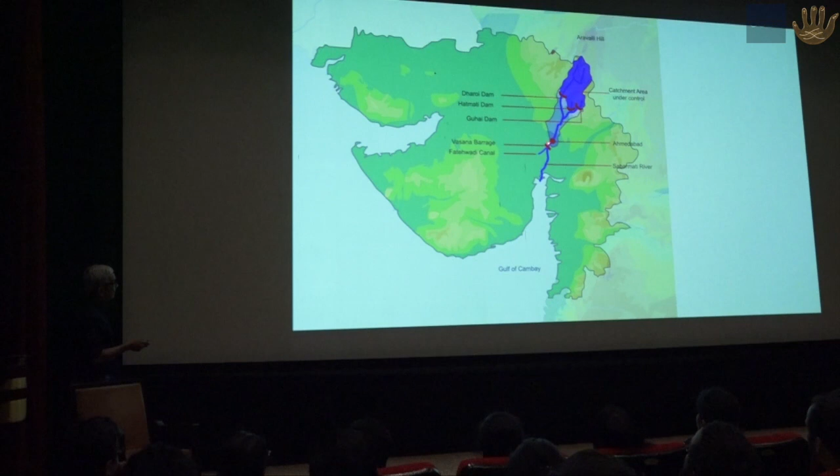When these dams were built, there was also a barrage built downstream of Ahmedabad here, and that was for irrigation. It's a low barrage, a 20-foot high wall, and that would hold water in the river after the monsoon, and the river started looking like this. So we had a seasonal lake in the middle of the city since 1976. Few months after monsoon, we would have water, and then it would go away as soon as the water was used up for irrigation. It would be empty riverbed, and the river would start looking like this once again.

Then, after that, the Narmada Dam was built, and as Ram explained, there was a canal that was built to take water up to North Gujarat and to Saurashtra, and that happened to go past Ahmedabad, just upstream of the city. Once this canal was built, we had a possibility of taking water from the canal and putting it into the river for irrigation. Now this made it possible for Ahmedabad to have a perennial lake in the middle of the city.

All of this happened without any reference to Ahmedabad. This is for irrigation, this is for flood control, and none of it had to do anything with the riverfront project. Once this lake got done in the middle of the city, we have this sort of a lake. You can see this river is sloping down from here to here. Here's the barrage, and therefore there is deep water here, and then slowly there's shallow water here. It's like a swimming pool. The bottom is sloping. We had a landscape full of lakes earlier. Now we had a large lake in the middle of the city.

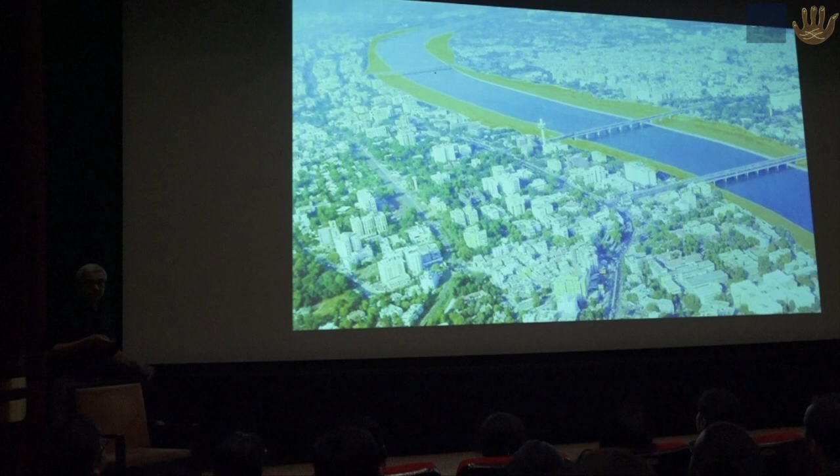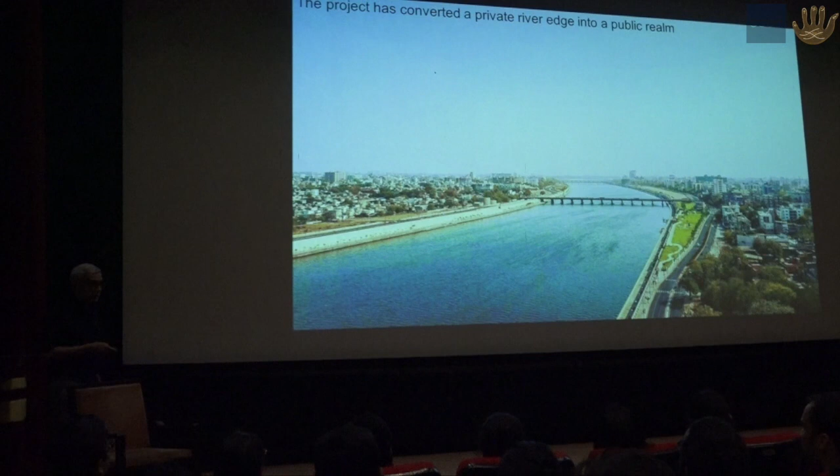The river used to look like this in 2001. And here you can see in 2006, the work has started here. And 2009 and 2015, and that's now the river with a public realm on both sides of the city. A river that used to look like this, today looks like this. So this is lots of space that was created.

It's a river without sewage. All this sewage that used to come in has been diverted through interceptor sewers. And this is the sewer being built, and the water is now more or less clean. There is still some work pending. It's a river for recharging groundwater, and the sewage treatment plants treat the water and put it back into the river so that we have a grand recharge mechanism. This work is ongoing, but there are other plants that have already started.

It's a river without slums. 11,000 families were given housing in all these red spot areas within the city. And you can see the houses were of this sort, and that is kind of interior view of one of the happy homes that was built. So 11,000 households. The project, I think Ram made a statement, it was not 11,000 crores, it was 1,100 crores. And the project cost was 1,200 crores. This is the cost of 2 5-star hotels. Okay, 2 5-star hotels is the cost of the entire project.

Anyways, no risk of flooding. Ahmedabad river used to flood, and everybody who could afford it had built walls of this sort. Now there is a common wall, and you can see the river in flood here. The lower level is submerged, but next day, after the water recedes, it becomes once again a usable place. It has to be cleaned up a little bit.

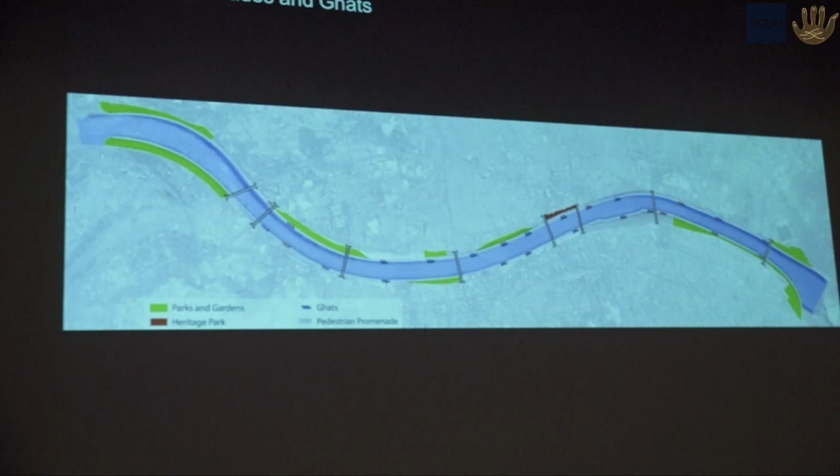It's a riverfront with parks and promenades. You can see there are many new parks along the river. Okay, and that was when it was opened up in 2012. That's from 2012. It became a place of pride for the city. Here's in the monsoon, and here's people sitting there. It's a place for all sections of society. You can see here, and that boating and exercising, and there are parks of this sort. This is a picture from 7 years ago. That's a new park that is coming up shortly.

So it's a riverfront with many amenities. That's a huge open air market for poor people. It's the flea market of Ahmedabad that you can see here. It's a Sunday market, which it was claimed was being wiped out. That's the kind of market that you have in place. These trees have also grown. They will also grow more. This is a laundry facility for all the dhobis who used to be there.

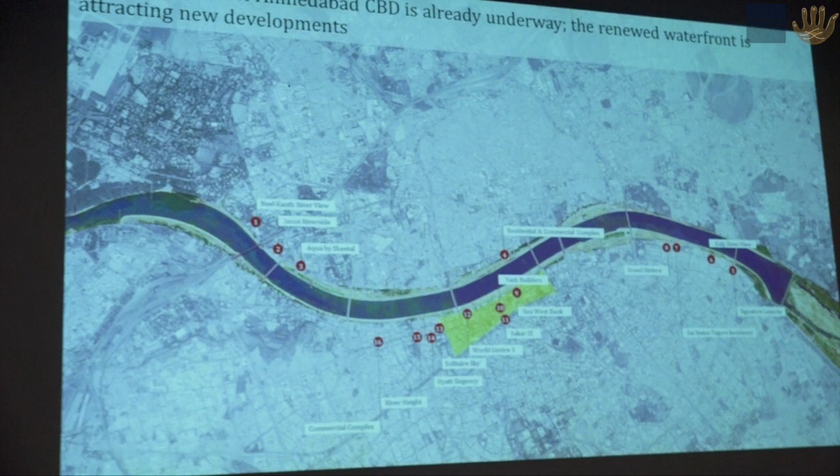This project has revitalized the city center. You can see many new projects coming up along the riverfront. All the developers are advertising their projects along with the riverfront. They are also paying for their FSI, so the city has a new income source. Here are some other projects. These are from developers' brochures, and here are places like this from which you can enjoy the river view.

We have a better street network. We used to have a poor street network, north to south, and this new street network was added because of the project. And this is one of the views of the streets. Here's another view of the street. There you are, that's another view.

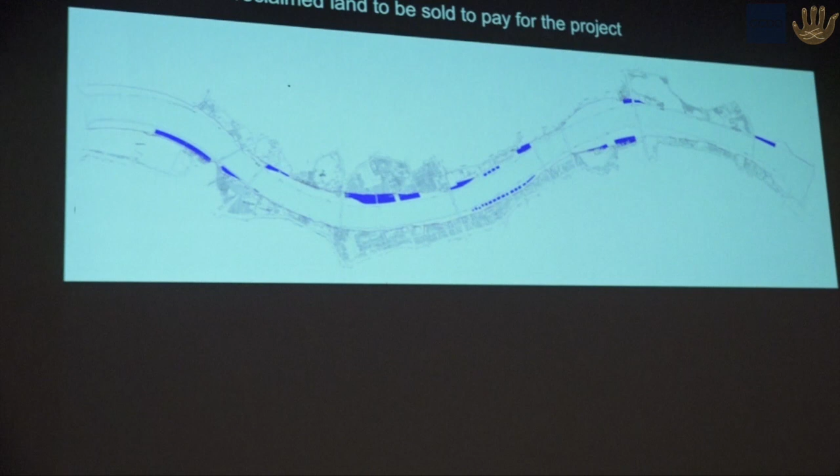So this is, in a sense, a proof that projects like this can be done, despite our fractious and difficult democracy. We don't need to be like a very authoritarian government. We can still do projects. They have to be structured in a certain way. They have to bring benefits for everybody. They have to make sense for a large number of people. And you have to implement these projects well. So that's the proof that some of the rest that I'm going to talk about can actually happen.

Okay? So let's start with the Mumbai project. So that's one of the 3 ongoing projects that I'm going to talk about. So the opportunity. Now you see that's Mumbai here. That's Marine Drive here. And normally we see this edge of Mumbai. This is where that big bridge is. And we see the western side of the Mumbai city. Eastern side, all of this is the port of Mumbai.

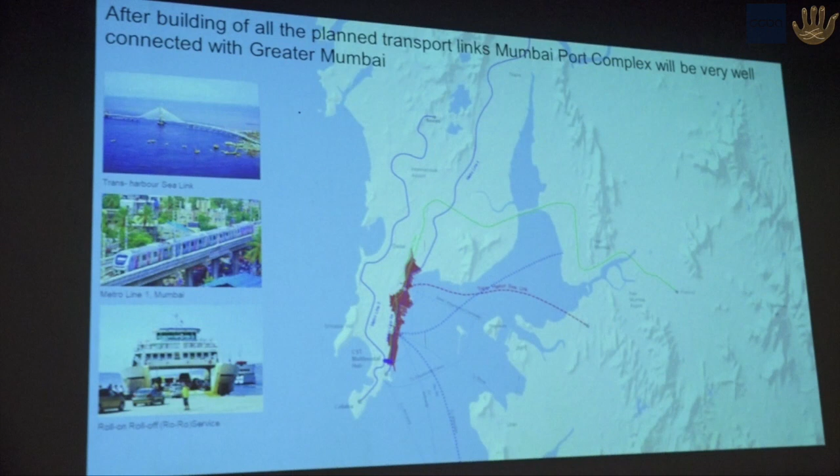So it's a terrific opportunity for the city to rejuvenate itself and make better use of this land. Of course, as soon as this project comes up, the first thing that comes to mind is the Mumbai mill land issue, where the owners of the land, in this case the government of India, which means all of us, are the formal owners. And of course, if it's valuable land, we want to monetize it. We want to ensure this land is used in a way that brings benefits to the entire country.

And the people of Mumbai are also very keen, because they say this is our city, we have very few amenities, and we would like this land used in a way that helps Mumbai. The mill lands ended up in a big fight, and because of the way that fight was structured, the whole of Mumbai in a sense lost out, because finally they asked for too much and got nothing. That's at least my view on the matter.

So what was clear to us when designing it is that we would have to turn a zero-sum game, a fight between the formal owners and the city, into a win-win game. And all urban design projects have to be like that. We think of everything as a zero-sum game. There are activists who say, I will save every tree and everything else be damned. There are activists who say, I will save heritage buildings and everything else be damned. They are like people fighting for their roadside shrine: I will save my shrine, the traffic be damned. We have to figure out ways to turn such zero-sum games, you win, I lose, into win-win games, where everybody wins something.

That was just a sort of a visual of how we believe the Mumbai Eastern waterfront might look like when it gets fully developed. But what are the ideas underpinning this vision? And what are the urban design elements like? Since I think a large portion of the audience is urban designers, architects, etc., I'd like to focus on some of these ideas here.

So here's what we see as the master plan. Here's another view of the same thing. And I want to say that it's made up of these many elements. Let's start with the first one. At the core of it, the plan is nothing but a strategically drawn street network. Here, that's the large piece of land that we are working with, about 7 square kilometers of land. And a dense street grid is at the heart of this plan.

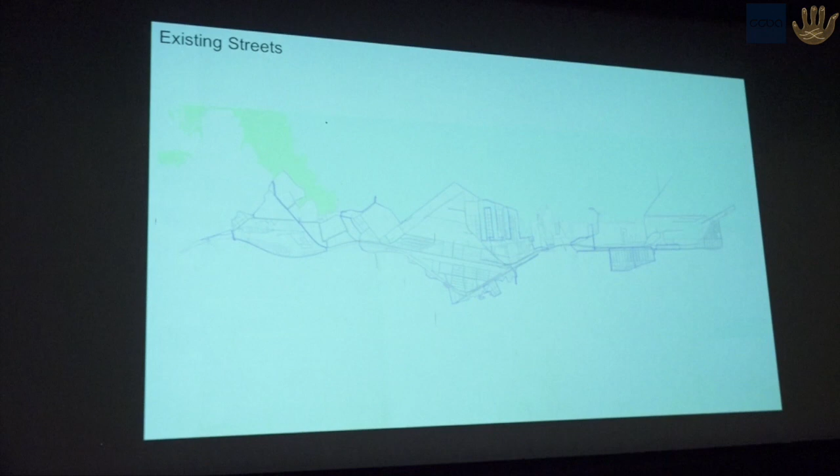What we did to draw this is look at the existing streets in the port, because the port already had some streets. We decided to use many of those streets, perhaps widen them, use those alignments, we added more streets to them and came up with a grid that matched with the grid of the rest of Mumbai. So this is not just a grid of streets standing by itself, but also integrated with Mumbai streets.

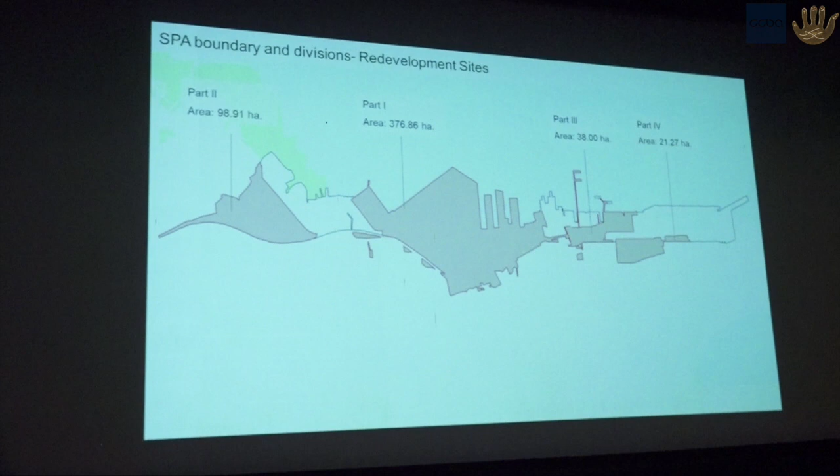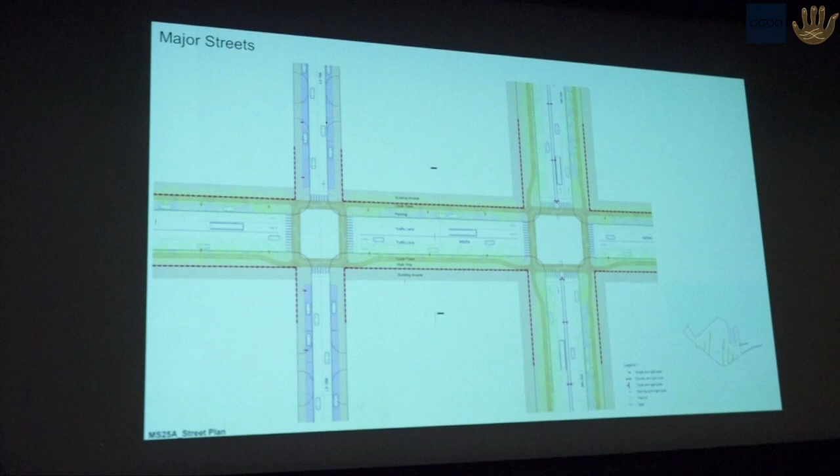Just take a closer look at this. Actually, it's made up of four parcels for redevelopment. I'm going to look at the center one here, and that's what the existing streets look like. That's the streets that are added, and that's what the street network looks like. Of course, the street network is also hierarchical. It has functional hierarchy, and it's been detailed with considerable care. This is the design for the major streets. All the other streets have been detailed, and this is the urban design vision for those streets.

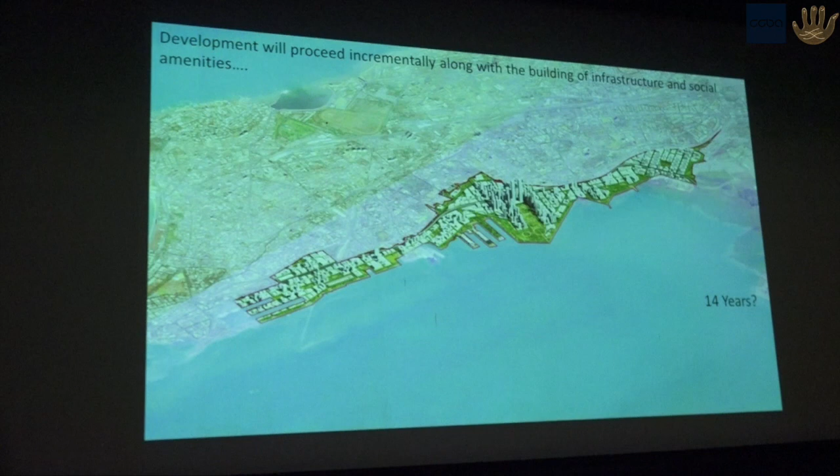Once the grid is in place, something will come up. In this case, the land will get freed up slowly as the leases get over, and bits and pieces of the city will come up, and over a period of time, it will all fall into place. So it's not as if this is one grand vision to be realized on one day, but it's incremental development, uncoordinated, messy, you might say, but the street grid is what will hold it in place. Okay, so that's that.

Second, public transit is very important, and more important is to integrate it with your street network. That's really important. I already told you there's lots of public transport planned for this area. The important thing is to integrate it with the fabric of the city and with the city streets. And that's what has been done here. You can see very carefully the metro alignment has been changed so that it matches with our street network.

It takes a lot of work to bring all the agencies together, and that's the work that's involved in urban design. It's your coordinating function. You are nothing but a coordinator at that level. And then to see that all the stations from there, what are the walking distances and how do you get to all the stations.

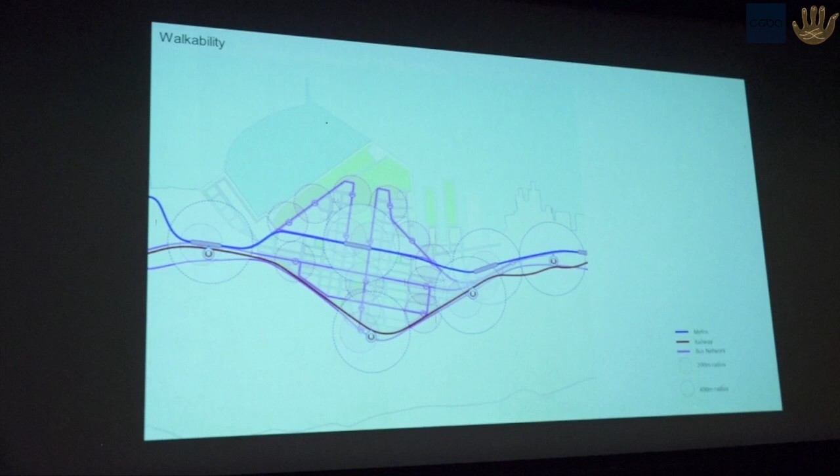Integrated and upgradable infrastructure. So once again, once you have a street network, you can put in all the infrastructure that you need. You can put in the power supply, you can put in the water supply, you can think it all out and say how much will be needed and work out the sewerage strategy and the solid waste disposal strategy, etc. And then you can also work out on the street what are the ways in which you put in all your services. But the important thing is not that.

The key insight to remember is that infrastructure of any city in the world is not built at one go. Nobody builds world-class infrastructure at one go. Everybody improves upon their infrastructure. So for all the people who say, have you done the infrastructure? I say, my friend, which city in the world has built its infrastructure on day one? What's important is leave adequate space and be ready to upgrade as the city grows.

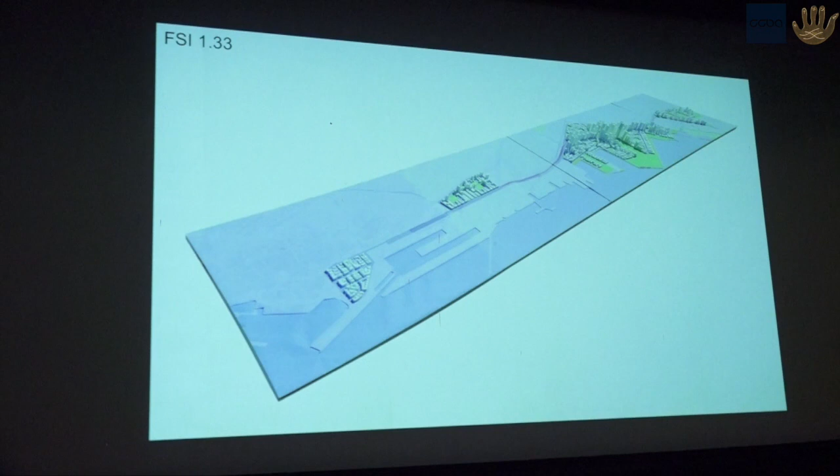Street network in the Mumbai plan allows for later strengthening of public transport, later addition of more infrastructure. This will permit more floor space to be added in future. Presently, we are putting in infrastructure only for a 1.33 gross FSI. I'm not talking about plot FSI, gross over the entire area of development. But we believe that later on, the next generation, there are going to be people who will say, oh my God, these people were very timid. Let's put in more infrastructure and build more. And we believe that after that, they will build more.

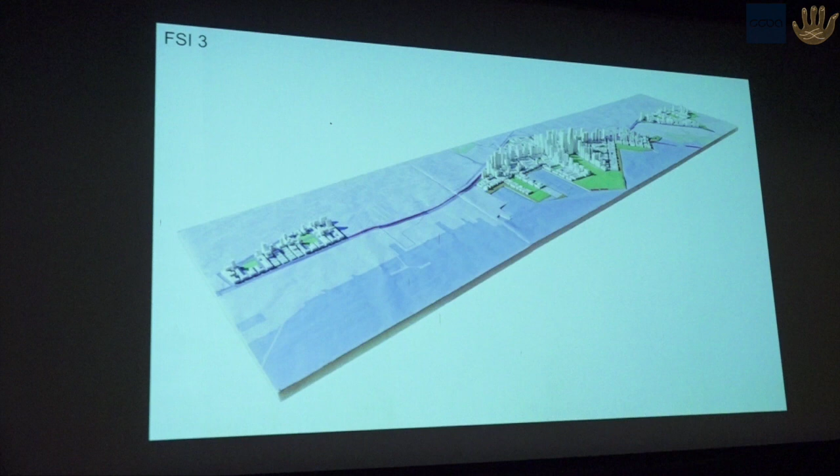Even when they come to this level, they'll be nowhere near Manhattan, because that has even more floor space. Okay. That doesn't mean there are more people. What happens is people become richer and they consume more floor space as societies become richer. And that's the story the world over, including India up to now. Adding more floor space does not add load to infrastructure. Adding people does. So don't limit floor space. If you can't limit people, just add more floor space. Okay? I don't want to get into too much detail here.

Now, here's a very important point of this plan. Indian cities, and I'd like you to look at this particularly carefully, because it's a very important thing that all urban design people should understand. We use our land very poorly. What do I mean by that? That's Ahmedabad, I showed you, and we took these 500 by 500 meter squares for study. And if I take this one square here in the center of town, as you can see, right next to the river, that's what it looks like. And I'm sure Pune looks like this too, and most of Pune looks like this.

And if you were to study the land use here and divide it according to the categories I'm telling you, not what planners use, not residential, industrial, and all that sort of stuff, but like this. First you find out how much is in public streets. Sorry, this has got all completely washed out here, but about 16.8% of the land is in streets. I'm sure Pune gives you similar numbers. How much in public open space? Very little. Streets and open space together make the public domain of a city, and most Indian cities have no more than 20% of their land in the public domain. Okay?

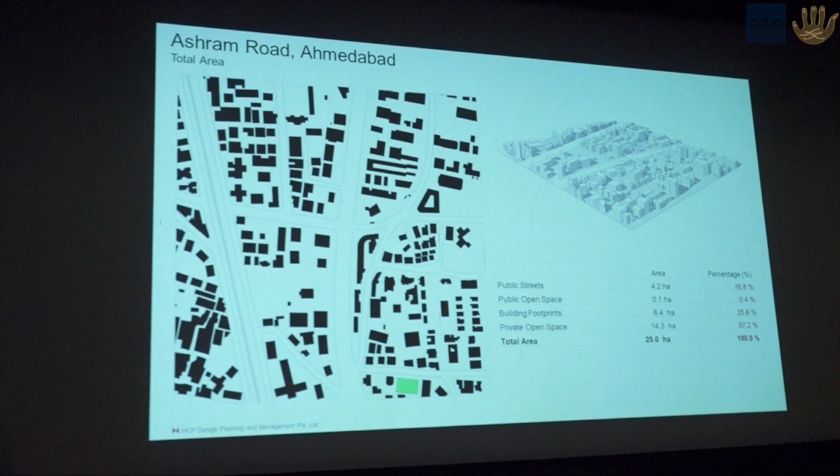All that 57%, sorry, there's something wrong with the slides here. If you look at this, all the 57% is the private open space that we are forced to leave around buildings because of building bylaws. And that constitutes a waste in Indian cities. All that red line is the private open space that cannot be used legally, and this we end up using suboptimally.

You see, all our cities look like this. They have lots of tiny fragments of space like this. It all adds up to 57%. Nobody makes that calculation. They are making the rules. But the rules end up forcing you to do this. And how do we use these spaces?

They are not very well usable. You know, as designers, look at these spaces. You can't grow trees, you can't play a cricket game here. You can romanticize about this, but when space is scarce, this is a waste of land. And I urge urban designers to actually walk around in cities and find out how these slivers of land are used. You take Mumbai, you have the same story.

You take Nariman Point, the costliest piece of land in the country. This is what it looks like. Once again, if you look at the figures, you see 53% of it is in private open space that cannot be used. Okay, ridiculous. It's very easy to do this research. It's Google Images, nothing else.

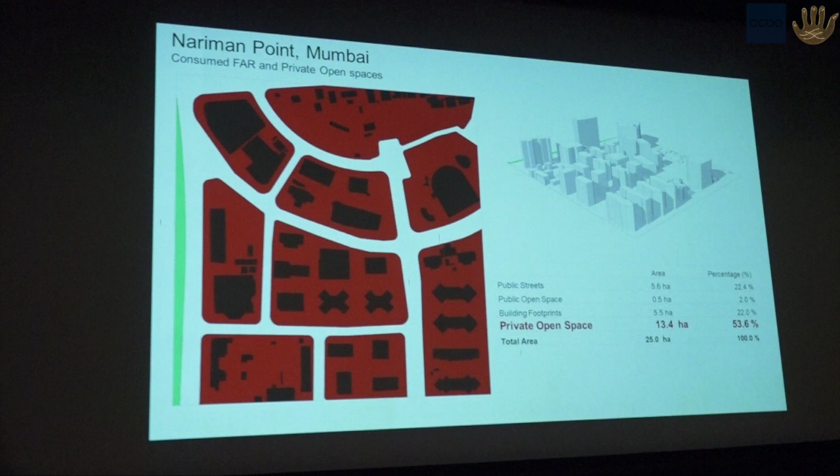Okay. Other cities in the world, take London, go and check it out. Here you have almost 30% in the public domain. So already doing 1.5 times better than us. No wonder their streets are walkable and we all go there as tourists. And their building footprints are, what's that, 65%? Okay. They know. People want more ground floor space, so allow.

So planners don't stop them from using it. They actually allow them to use it. And then you have private open space, which is very little, which is 4.8. You will see that in every city in the world. San Francisco here has 32% in public streets, and parks and gardens, 36% in the public domain. You can see 61% in. Now this will change as you take a square of the city, but this is an average. And private open space is this.

We can say that generally speaking, in Indian cities, that's the situation. 20-25% in building footprints, 20-25% in public realm, and a big waste of 50 to 60%, and this is done by bylaws. Man-made. There's nothing that tells you to do it this way. Now, in western cities, 50 to 55% in building footprints, 35 to 40% in public realm, and 10% in private open space. No wonder those cities work better.

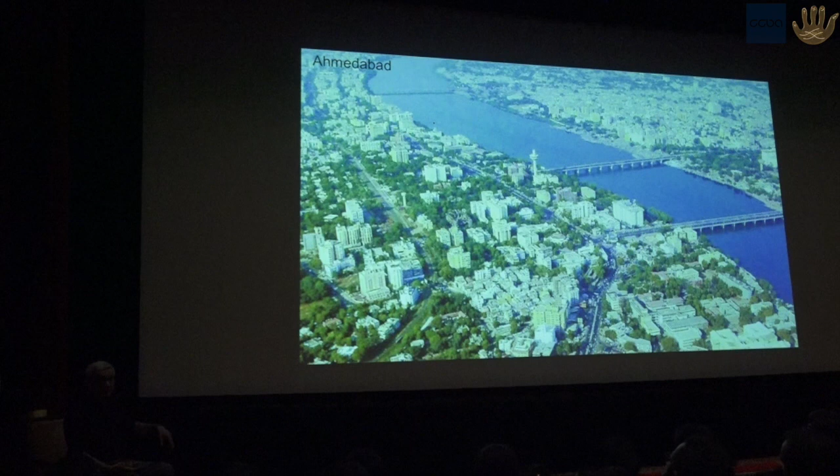Now the port redevelopment makes very sensible use of land. And by doing this, it turns a zero-sum game into a win-win game. Okay? If you were to compare the port development to the rest of the island city, here's what you will get. The land in streets in this area here is 36%. In the rest of the city, it's 17%. So we are already putting twice the amount of land in streets.

Nobody ought to complain. The amount of FSI we have here and here is the same, but we're putting twice the amount in streets. And streets are the most important area in a modern city. That's your public domain. The next is parks and gardens. We happen to put, in this case, 26% of land in parks and gardens because Mumbai is starved of it, and the rest of the city puts 8%. Okay? So 26 and 36, 62% in the public domain.

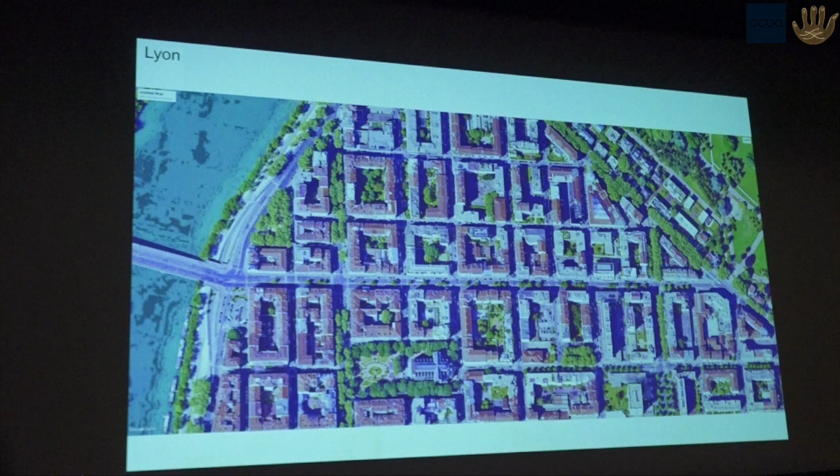Low-rise is like this in Lyon. You can see you have well-defined blocks. You have low-rise buildings. You have streets. You have open spaces in the middle. And the streets at the street level, if you look at it, will look like this, not very tall buildings. We have examples like this in our cities.

Okay, Ballard Estate, when it was built with this sort of urban design form, thoughtfully. And here every building was done separately, and yet they all added up to make some sense. And so you got a wonderful urban area that looks like this. It has streets, it has ample space for trees, it has buildings like this, and coordinated arcades. Every building is different.

Architects have done their numbers, so to say, but the urban plan has ensured that a form emerges that makes sense. Everybody matches up with everybody else. Okay, and the Mumbai plan is designed to do precisely that. I'm losing contact with this. Okay. It's like the plan for Ballard Estate.

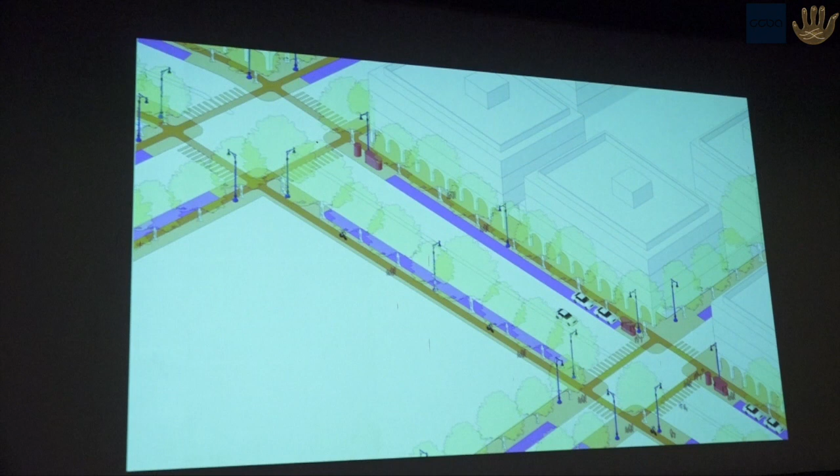All the blocks have been well thought out, and the floor heights are fixed in all of these, and so the volumes are fixed, and it has been thought out in careful detail. Now the architects can go in there and build within that volume. But none of this is possible unless you have good bylaws.

So we had a chance to write a new type of bylaws here, and we do not use text-based rules like our normal bylaws. Our normal bylaws look like this. There's not a single drawing mostly in these books. They are all text-based. They are written by administrators and bureaucrats. These are not drawn up. If you are concerned with form, you'll have to draw up your bylaws. That's the opportunity that this project provided.

We made a very simple, easy to administer sort of building bylaws. I won't go into details, but if you can see this drawing, it's not very clear here, but here are the plots. If I zoom in here, sorry for this washed out thing, but these are the plots. These are all the plots that you can see. These are the divisions of the plots. These are the setback lines that have been drawn up.

These are the volumes, the development envelopes within which people have to build their buildings. So from day one, the volume within which the building has to be built is done. We know which are going to be the tall buildings, the lower buildings, the higher buildings, etc. All the neighbors know what's going to come up next to them. Inside it, this is the amount of floor space that you can fill up in the volume.

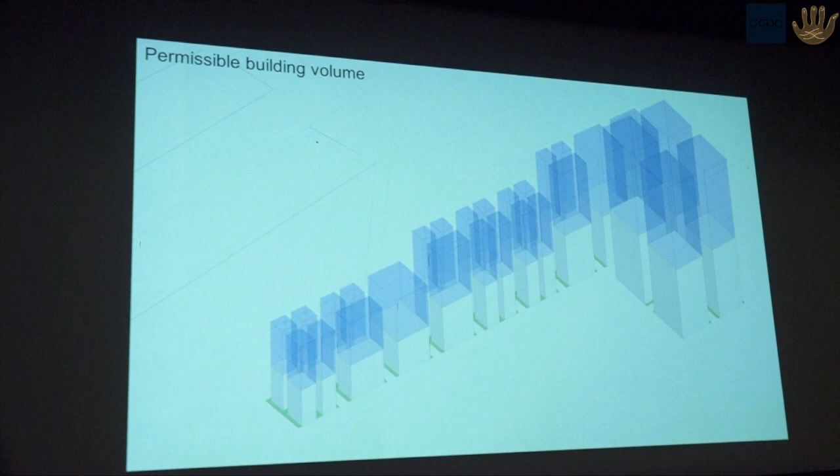Nobody will build buildings like this. The architects will all design separate buildings according to the needs of the client and the site-specific area. And these will all be optimized to meet the needs of the owner. Then you would perhaps get a landscape like this. This is just speculation. Every architect will do something different.

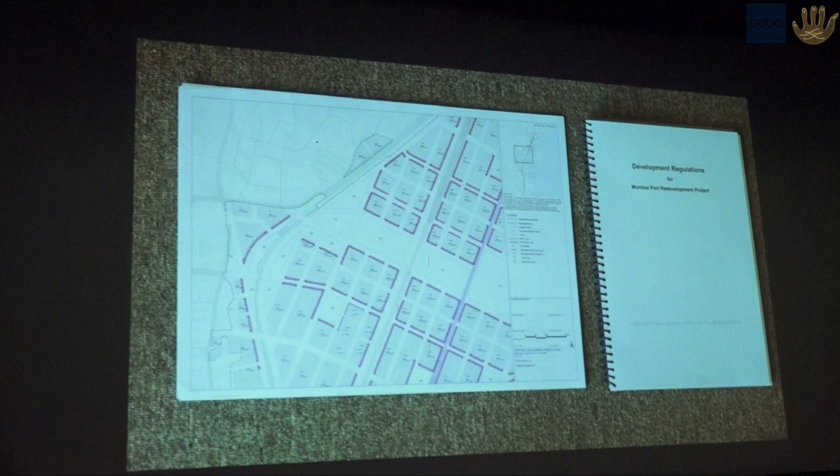The bylaws actually look like this. There's a set of drawings and there's a set of text-based rules. You will still need text-based rules for certain standards like engineering standards, etc.

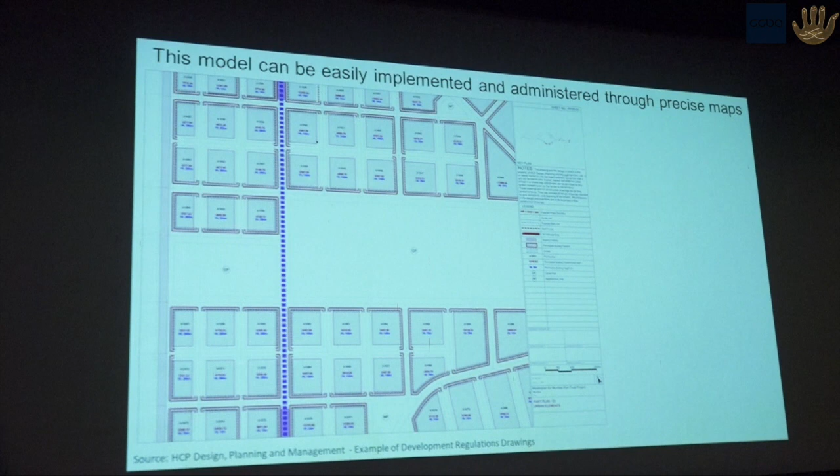But height and bulk regulations will all be in the form of drawings like this and of this sort, which indicate clearly, make it easy, just define the development envelope. Okay, many cities of the world do this. Look at the Singapore plan, you will find it online. Bylaws always have drawings. Ask for bylaws with drawings. That's what you have to do. Or some of you might later on do more of this elsewhere.

I've told you what this plan is about, and if it finally goes through, it's slowly making its way through the whole process. Recent political changes have made a little bit of a slowdown in the process, but it's slowly moving ahead. Someday if this develops and this plan is adopted, I think this plan, in a sense, proposes a new urban design paradigm for India.

We have been writing our bylaws and making our plans, which is the DNA of our cities, in a way that we get the cities that we have today. The plan and the bylaws already define the city. We are trying to write up a plan and bylaws that define a different sort of city. And that's what I wanted to say here. So we stop, first one done.

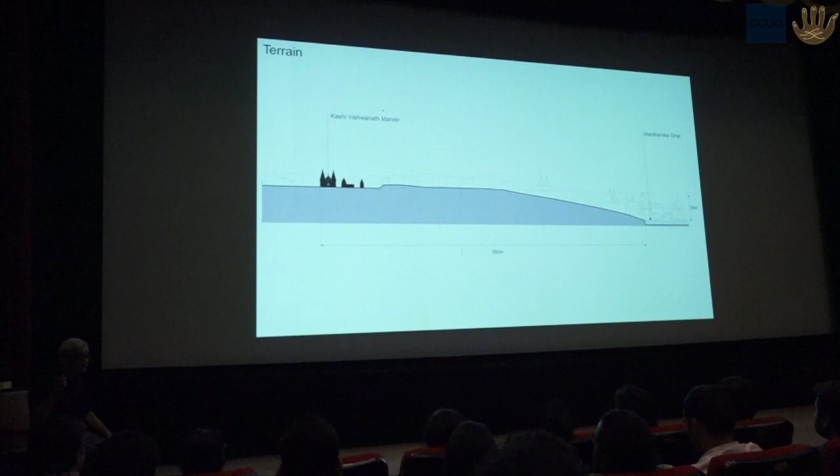If you look at this area, that's what the terrain looks like. That's the mosque. The mandir is here. Manikarnika Ghat is somewhere here. It's on a hill, 100 feet up, 350 meters across. Not a very large area. The temple and the masjid: there's a long history of the construction of the temple, its destruction many times. Finally, Aurangzeb destroyed the temple that was there and built the Gyanvapi Masjid, and the temple wall was left at the back here. That's the way it stands today.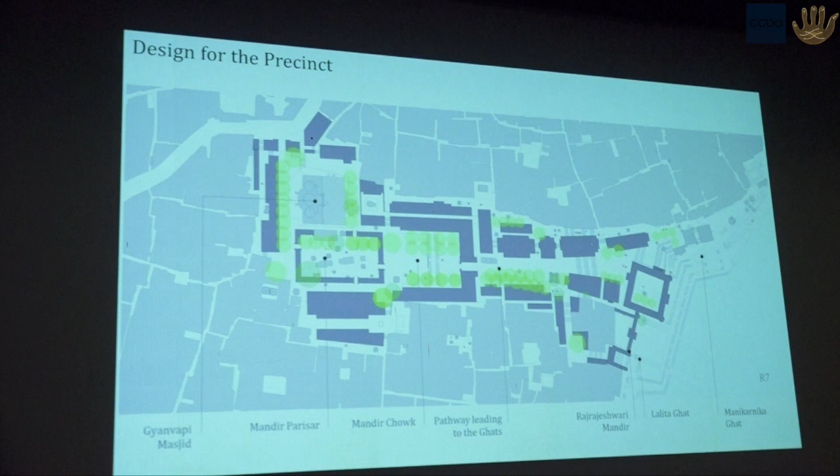Even if I were to design a home, somebody says, do me a home, that's how you do it. Okay, I've drawn something, what do you think? And they say, nah, not like that, like this, like that. And then you throw the sketch away and start again. So the sketch kept going on, and finally, that's where it stands. Now let me explain what this is about. That's taking that area and turning it into an area like this.

Let me explain different features of it. The parisar is simple. That's the yellow area I'm talking about. Presently, the parisar is that small. That's sort of the ambulatory around. You can see it's very tight. Hundreds of thousands of people come here, and it's a very, very tight spot here.

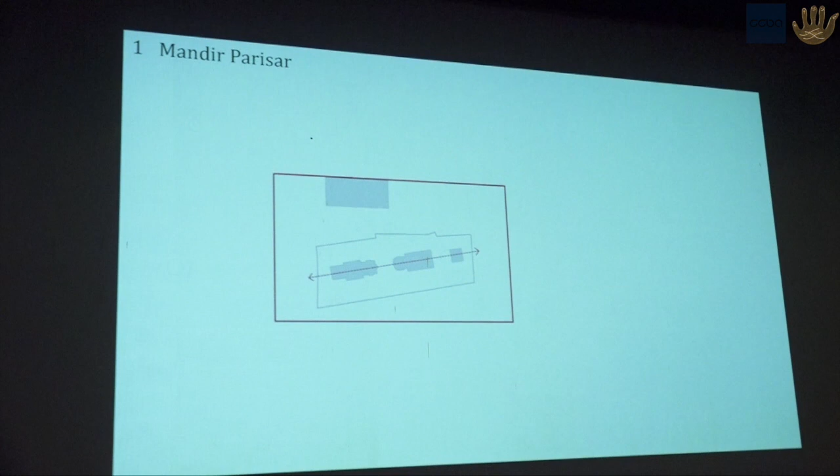So we took that area here. We sort of saw the axis of the temple, put two squares around it, straightened it out to align with the mosque, to align with the important structure next to it, made it a little larger, and then put an arcade all around it, and essentially created a larger space around the temple and a parisar that would be pretty much in the traditional form. And that's where it is.

Sorry, these drawings are not going to come up here very clearly, so I'm just going to move on to the next one. Hopefully this will come. It takes a little long on this computer. Forget it. Next one. You'll see it later.

Outside it, we have this chowk. So we took this rectangle that we had put in, extended it twice the amount here, and created a civic space outside the parisar here, and built a building around it that would hold lots of facilities. For example, a large number of toilets, because you need a huge number of toilets. It's pretty straightforward what you want to do when you have to create facilities. On the upper level, maybe shops, maybe an exhibition place, emporium. I'm not going to wait for this drawing. Let's look at it later on, and you will be able to appreciate what this is.

There are many approaches to that area. From the road, there is actually just one approach. So there's a street like this to this big temple, and that approach has been improved. Presently the approach looks like that. That's the entrance to Kashi Vishwanath Mandir, by the way. And so that needs to improve and become better. And if some sort of emergency vehicles can come in, it will be better. So that's what we have done out there.

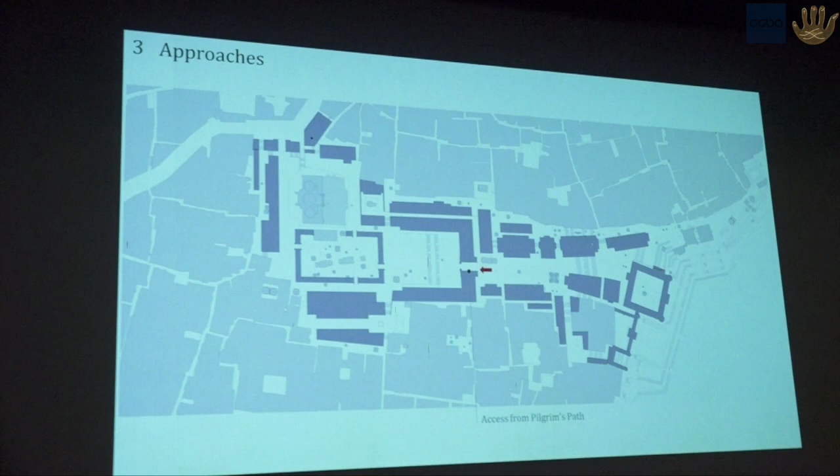Then you have an approach from the Ganges side here. That's really on axis to the temple. You want to come here and you want to create a gateway. From the gateway, the first thing you see is the shikhar of the temple. That's the gateway. The gateway is designed using one of the local gateways as a model, and so it reminds

you of that area. The path leading up from the Ganga up to the temple is that. If you arrive by boat, this is how you will approach it. You will see these large pumping stations, and you will see all of that here. If you come by boat, it's difficult to get off really. It's not very comfortable to get off at this place. It's quite messy. And then you go up this lane and into a narrow alley, up that place here, and go through these lanes and go to the temple.

Okay, but I think now there will be a different approach. There's a wider, larger space. You can climb up these steps. It has to be a pleasant experience so that you come here for a spiritual purpose. And if all the time you have to look down on the floor and see where you're walking, I mean, some people romanticize this, but I think that's not the idea. So that will be the approach that will lead you slowly up to the temple here. And that's that.

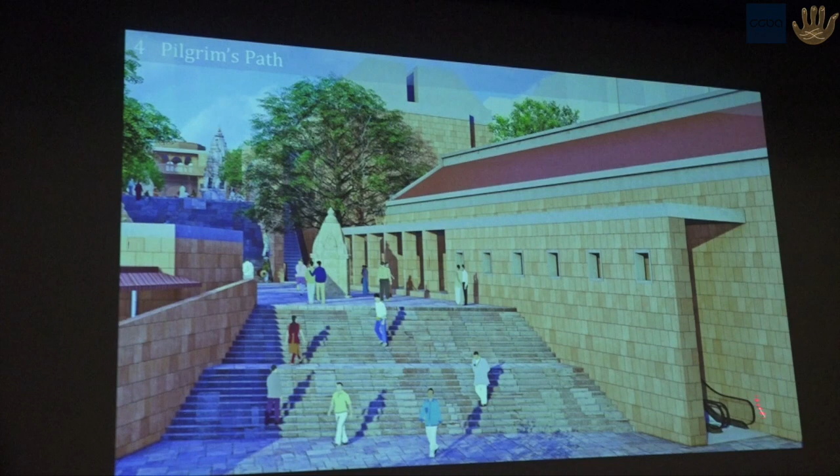Here you are. So also some escalators for older people to climb up here. And that's the view from when you're up there looking down at the Ganges. It's very poor. There's also cultural civic institutions along the path that you can see here. These are some old buildings that were existing. This one is an old one built also at the same time that the Holkars were building here. Jalasan Terrace, it's called. It's encroached upon by all sorts of housing just now. You can see it's really in poor shape.

That's that structure that's here, and actually the structure at the back is quite beautiful. One needs to bring it out and use that. Behind that there's this old hostel which can be restored. So that's what this area will be. Eventually a terrace up here, that's the old structure here. That's the hostel at the back, a stage here for performances, etc. Along the path, there are many other exhibition galleries and places like that. I'm going to leave this drawing and we move up here to this place.

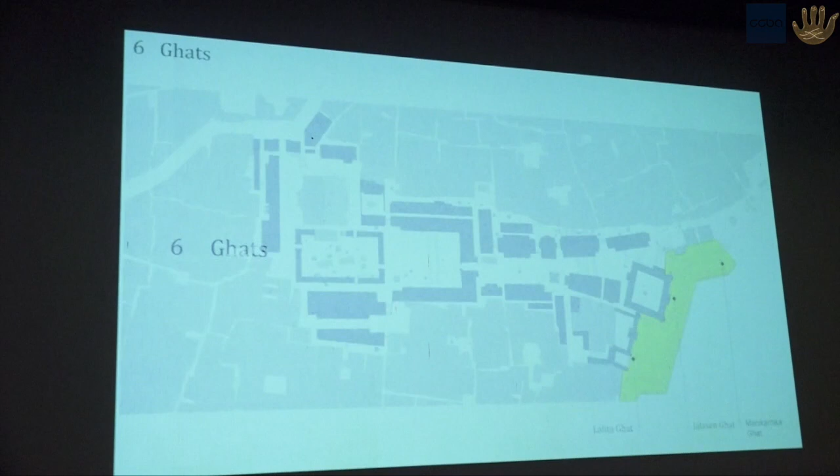The ghats themselves, there's much improvement that's possible here along the ghats. They haven't been taken care of for a long period of time. There are 3 ghats, we're not going to take care of all of them. Sorry, here you are. First, remove this sewage pumping station and bring this old structure back into the fore, and also create some jetties, a performance stage, so that you really get a much nicer area there. That's Manikarnika Ghat, the most important cremation ground, and that also can do with much improvement. It doesn't have to be like this.

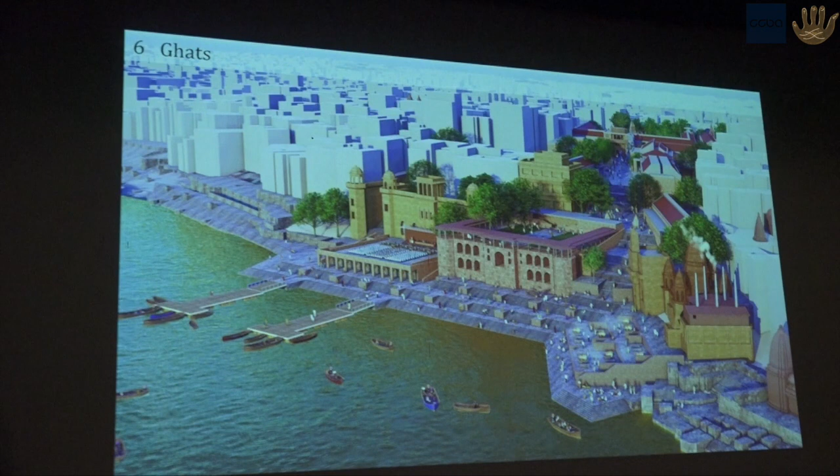Okay, so here's Manikarnika Ghat, and that's the development that we're talking about. Pilgrim and tourist facilities, lots of pilgrim facilities like food courts, guest houses, places to leave your baggage, places to leave your shoes, locker rooms, so on and so forth. And that's the idea here. Lots of administration and security facilities are required, offices are required. So essentially, it's a lot of logistics and a lot of functional improvement in this area.

There were lots of temples in this area. So when the houses were pulled down, we discovered magnificent temples that had been encroached upon by all the development. So when a lot of people talk about all the heritage being destroyed, they are not really looking at it in the fullest sense of the term. Here you had buildings that had their slabs put on structures like this. And when these buildings were torn down, you found temples inside. There were nicer buildings too, but many of the buildings were just encroachments, nothing else.

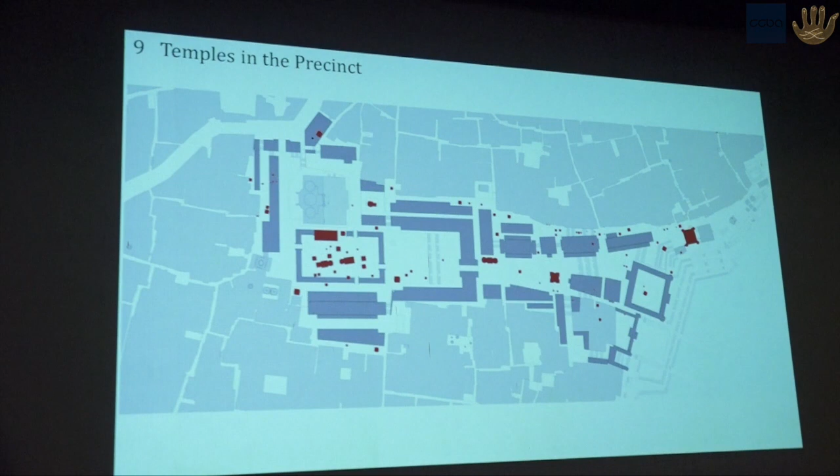And those are the temples that have been found. A lot of the later detailing job is about integrating all the temples with the master plan. So the master plan continues to evolve and change after this has been found. The landscape, there were very few trees here, but since it can be quite hot there, we'll plant a lot of trees along this area also. And here's a model that gives you a sense of what this is like. And very quickly, we can show you one film that just takes you through. Can we do that?

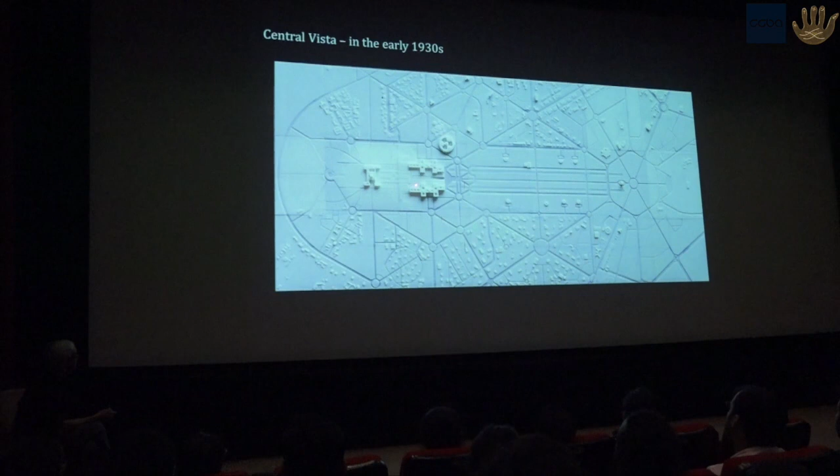Now there's no doubt that the Central Vista, built at that time, was a spectacular architectural achievement. It's magnificent. Even now, after being there so many times, when I walk up Raisina Hill and see the buildings, it still gives me goosebumps because it's such a magnificent achievement. It was built to house a colonial government and to symbolize the Raj, but it was unhesitatingly appropriated by the people of India and the government of independent India. That's in a sense the Indian genius.

That's Mountbatten leaving for the last time, the flag of India coming up, and on 15th of August 1947, people just swarmed over the hill and took over the buildings and made them their own. The Viceroy's house became Rashtrapati Bhavan. The statue of King George V was removed from the canopy. The canopy stands there. At the other end, Council House, that Ram referred to, became India's parliament, was never designed to be the parliament. And North and South Blocks house the most powerful ministries of the government of India.

Post-independence management of the Central Vista was, however, very poor. It lacked any sort of comprehensive and inspiring architectural vision. Already, during the Second World War and later, the two sites, these plots that were empty originally, were used for barracks-like structures that were coming up because there was need for that sort of space.

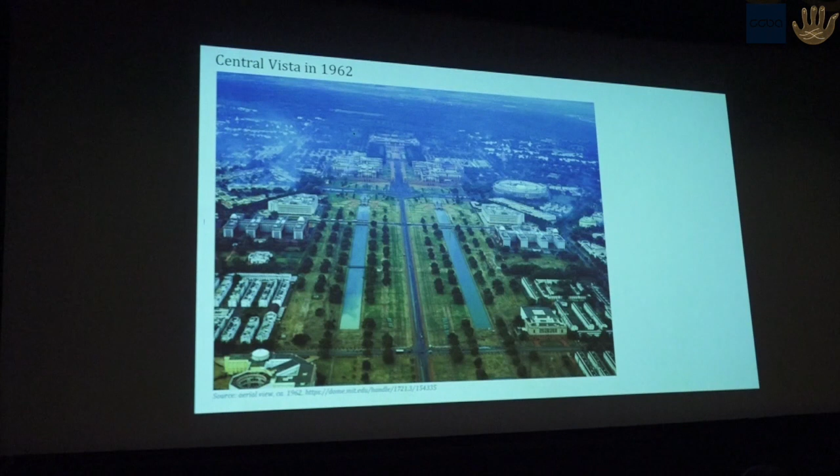sorts of buildings. 1962 picture, you can see here already Vayu Bhavan, Rail Bhavan coming up here. This new street was added, and this is Krishi Bhavan, Udyog Bhavan, and then those barracks-like structures, National Museum, various other such things. And you can see these trees here, two lines of trees for this place. So what we had inherited became like that.

Now, if you look at this, it's a disorderly layout of buildings that we have added out here. That's very clear. It's incoherent architecture. It's all different ones, don't add up to anything. A hodgepodge of different uses. You have residences with it, that's the vice president's residence, there's administrative facilities, cultural facilities, all rather incongruent and without any particular order.

No space for all the ministries to be housed in the Central Vista. Only 22 of the 51 ministries are housed here. The rest of them are scattered all over Delhi, meaning that everybody has to travel long distances to meet, which means that they often don't meet and operate in silos.

Some plots like this were hutments-like structures, which are called hutments officially, but actually are offices. They are not residential structures. They are inside walled compounds, very nice walls outside, but inside it's a rural, informal setting, very, very poor use of land. Lots of people working there, and facilities that don't necessarily have to be located there. Very, very poor use of land.

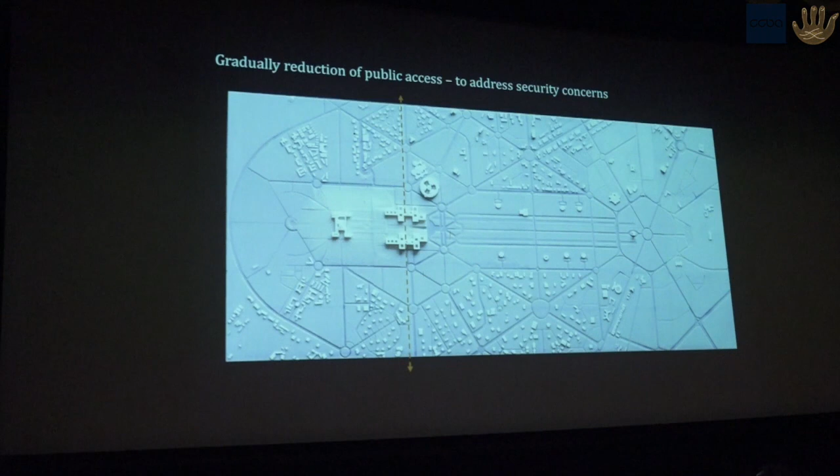Most of the buildings have a sea of parking all around. If you remember the earlier talk, ground footprint is very, very poor. Inside, if you look at it, that's what the offices look like. And even the access that people used to enjoy, you could walk through these buildings, because of security reasons access has reduced. Actually, the Central Vista itself is encroached upon by these bhavans to create space for parking. So from behind, the compound walls have been opened up and parking lots have been created on the other side, and some infrastructure has also been put in.

If you look at the landscape, it's quite lackluster. That's your central iconic space of the country. It's a big civic garden, very important for the people of Delhi, but there are very few facilities for them, such as toilets, etc. If you see here, inadequate facilities for tourists, and nothing like inspiring capital complexes world over.

If you go to Washington and spend a day at the mall, it's a comfortable and memorable day, and you will remember it for the rest of your life. It's a fantastic experience. You go to Paris, it's not the seat of government, but nonetheless, it's an iconic space. You walk up the Champs-Élysées, you go to the Louvre Museum here. That's a fantastic experience. Everybody from across the world wants to go there once.

Over the years, many people, many institutions have demanded that the Central Vista should be better administered, better developed, better maintained. In fact, people have written up administrative notes saying that these old buildings should be torn down and new ones should be built, and that its heritage should be protected. Nothing was done, like in the Varanasi case. Something is being attempted right now.

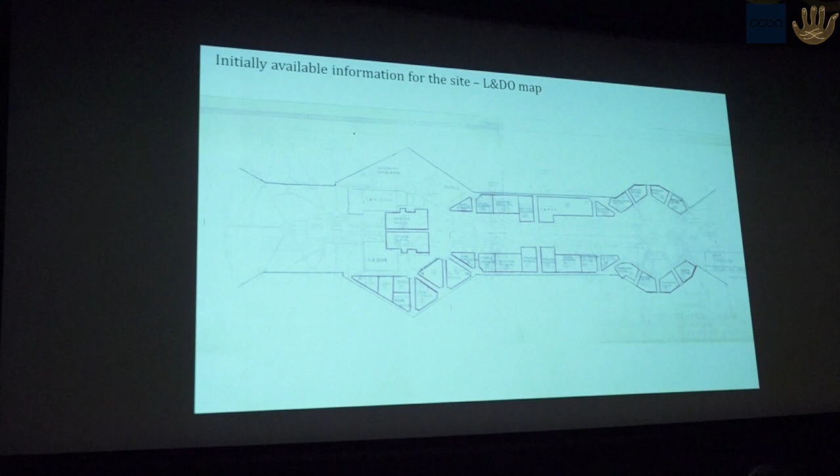So what's this project? Let me explain to you what the project is about. Well, once again, the master plan for the Central Vista project started with a sketch developed in response to very, very broad requirements, like the Kashi one that I was telling you about. Here you have, this is all the information that was provided. There were thankfully good history books, good historians have studied the buildings.

From that we could find old maps, and thank God for Google, because without Google what would we do? This has so much information that we were able to build up a model like this from the historical maps and what was in Google, and then we were able to build up a model of what we have done to that inherited space, and then we developed a sketch model for what can this place be.

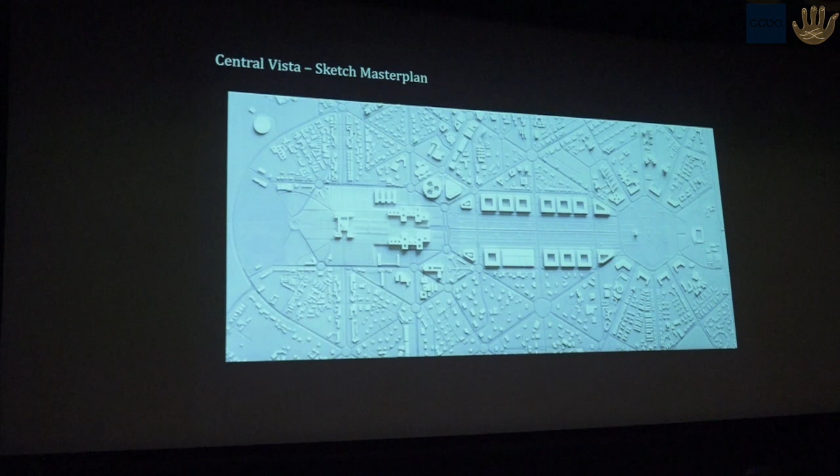This master plan has evolved over the last 3 months and will continue to evolve as we go ahead and do stuff. Here's what it was on 11th October and 24th October, and it changes on 24th November and 24th December, and so on and so forth. What I'm going to talk to you about is the 3rd of February version of the plan. As we continue to work on it, it will evolve.

Only people who have never done a plan will believe that you can make one perfect plan to start with. You cannot. Only somebody who has not designed a house believes that you can ask all the family members what they want and then come up with a perfect plan. This is ridiculous. You don't do it like that. We know that design is an iterative process, and that's what's ongoing right now. Here it is, 3rd of February plan, and that's what it looks like.

Now, what are the objectives of the Central Vista project? There are 6 objectives. Let me go over them one by one. Modernizing Parliament's facilities is the very first one. If you look at Parliament House, it's this round structure that we all know very well.

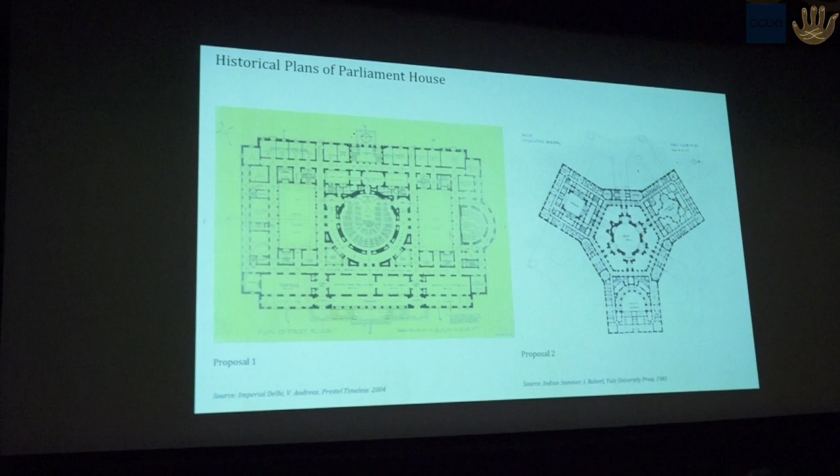We tried to understand the existing facilities. We looked at historical drawings. It was not supposed to be round. Baker wanted a triangular arrangement of this sort. Lutyens didn't agree. Eventually a round was built. There are very, very old drawings available, but not in a usable form, so we have redrawn all of them. These are old elevations. We have redrawn the elevations so that we can start appreciating their architecture a little better.

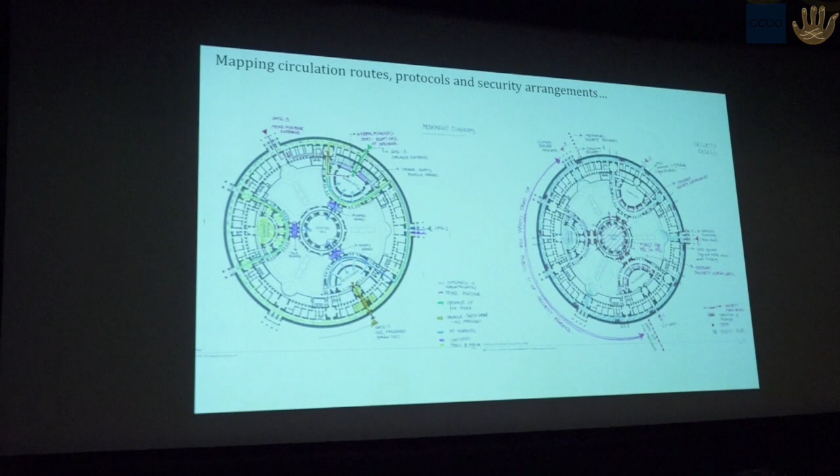Of course, all the rooms and adjacencies, what is the space utilization has to be studied, because in India we don't have maps of how these things are done, management systems. We have to study all the protocols, where does the president enter from, where does the prime minister enter from, so on and so forth. This is the way because it's a complex building. You don't understand all the furniture. People sit down here and debate, that's the main job. So we have to understand that well.

We studied the expansion possibilities because India's Parliament will at some stage after 26 be expanded to have more members. Today there are 552 seats. You can see that this corridor at the back behind the columns has already been filled up with seats. Not a single seat can be added, and that's one of the problems.

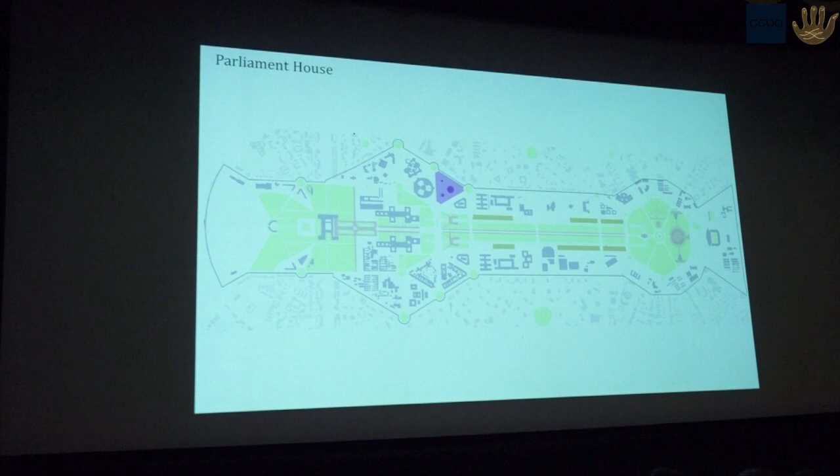We looked at this plot next to it. It's a triangular plot here, and a triangular building made sense here, given all the functional requirements. Design for this is also ongoing, and if you look at our studio, there are sketches, models of all sorts just now. I'm showing you plans that are not there. We have to tender out soon, but it's still evolving. So I'm showing you halfway work. That's what it looks like.

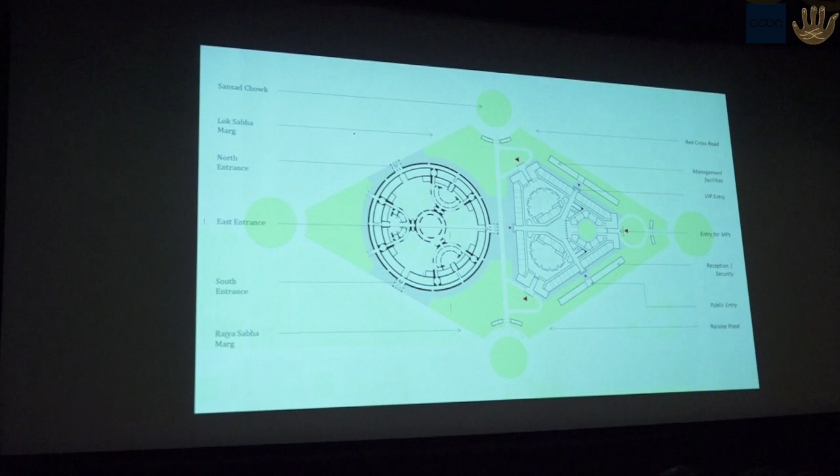This whole diamond plot is presently also a compound of the Parliament. This is not a garden here. This is a parking lot, and infrastructure is out here. So we're going to remove the parking, remove the infrastructure, and build a new facility out here. Officially, I might just mention that this plot in the development plan says garden. That is why a land use change is required. Presently, in reality, it's not a garden, but that's what a lot of the debate is about. Very often people forget that.

In any case, here you have the Lok Sabha, Rajya Sabha, you have the central hall here, you have Lok Sabha, Rajya Sabha, and a lounge here. We are not going to have a central hall. The Lok Sabha is designed to function as a joint session hall, so it has the capacity to seat 1.5 times the number of people, and I'll tell you how we are doing that.

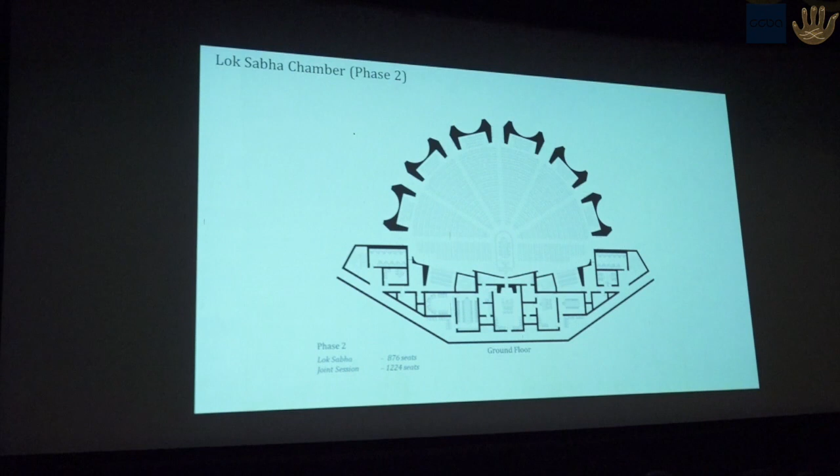That's what the plan looks like. At present, I'm not going to go into details here. That's the Lok Sabha chamber, that's the Rajya Sabha, that's the lounge, that's the central foyer, there are offices all around on this side. Actually, it is much like this plan here, which has offices, a corridor, offices all around Lok Sabha, Rajya Sabha, Central Hall, and courtyards here. We'll have just one small courtyard here in this building. That's what the Lok Sabha chamber will look like in phase 1, and there'll be more seating in phase 2 when the parliament is eventually expanded.

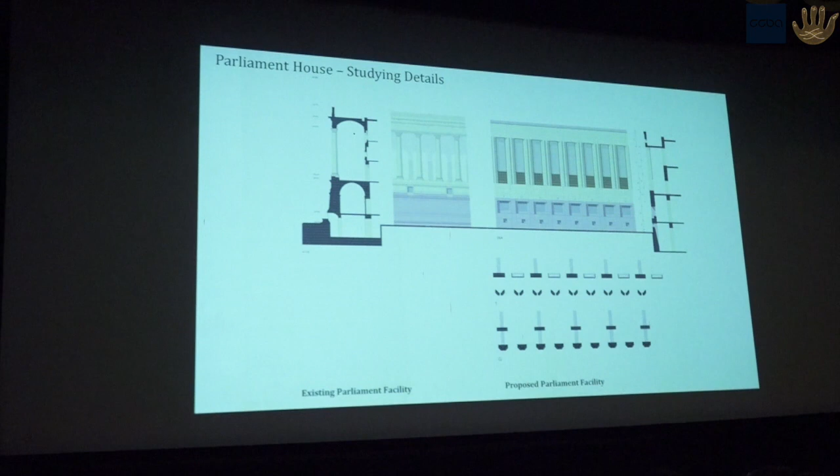We are constantly referring to the building next door. I explain to people that we want the two to be related, but we don't want them to be identical twins. We don't want them to be siblings either, but certainly we want them to be cousins of each other. So we are trying out many different things. That's just one quick image of what the two would look like together in this place.

Only the front 2 rows get a desk. The rest of the people don't get a desk. You have to walk in front of other people to reach your seat, very uncomfortable and disturbs everybody. Of course, you can give no modern equipment like touch screens. If you don't have a desk in front, there's no technology.

And so what we are proposing is that there will be benches with only 2 people sitting, but they're wide enough so that 3 people can sit when there is a joint session. So you get 1.5 times the capacity. And everybody will get a desk, there will be no movement in front of people. So I'm not going to go into details.

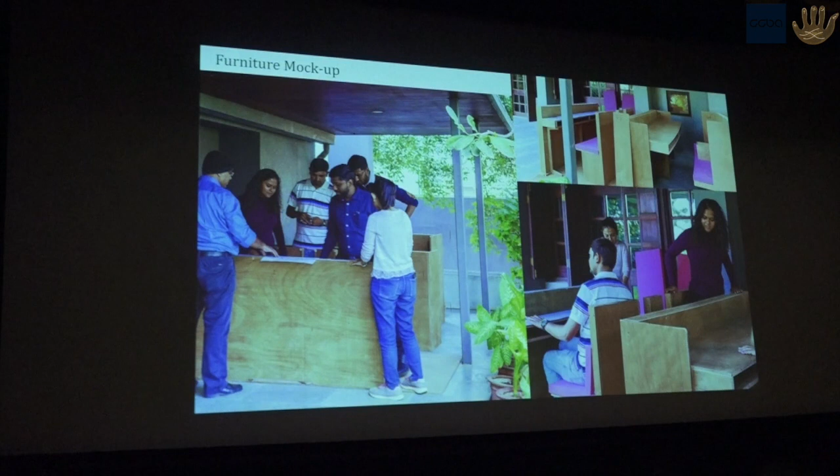There's lots of furniture. These are mock-ups, furniture studies. This is a mock-up of what the ramp will be like. We are doing away with the steps. The technology: we are working with a very good acoustic design firm from San Diego. And you can set the mood of a place by the acoustics.

This place has wonderful acoustics, it's very different. You should see the acoustics in the present parliament. It's very poor. All they do manage is no echo, but besides that, there's nothing much that's there. There's lots of technology that has to go in, like voting system, audio-visual systems, etc. I'm going to talk about all of that.

Of course, the building has to be celebrated. It celebrates our nation and democracy, and maybe someday it will be lit up with the laser lights going on. So that's all I'm going to say about the Parliament right now. There's a lot more, but I want to go over the plan as a whole.

In this plot here, it's proposed to build chambers, offices for parliamentarians. Presently, parliamentarians have no offices for themselves. Of course, the Parliament building has offices, but only a few members, the ministers, etc., get offices. The rest of them don't. So in these two plots, there will be 1,000 offices for all the parliamentarians built here, with adequate parking, etc.

Now, the other big objective is to improve productivity and efficiency of administration. Now, as architects, all of us know this is very important, and architecture plays a big role in productivity. That's the Central Secretariat, and that's being built to improve productivity. What do I mean by that?

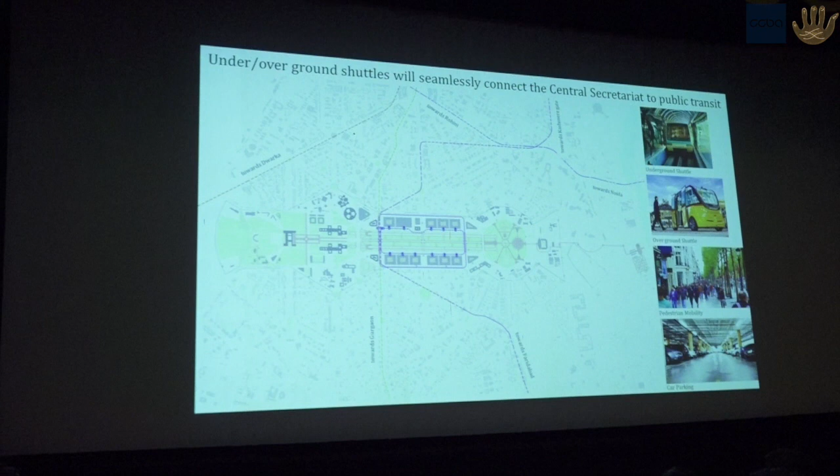There will be an underground people mover that will connect all the buildings to the station, so most of the employees can come here by metro and easily get to their office, much in the way that airports in the world have a people mover to move from terminal to terminal. Think of Singapore, think of Dubai. These are not very fancy systems.

Actually, it's not even a rail system. It moves on rubber wheels, but it's provided power like this. But you can move 20,000 people in an hour from the metro to their office. Go to your basement level, go up escalators and go to your office. So you don't really need to choke up the streets, and you can enter and exit with ease.

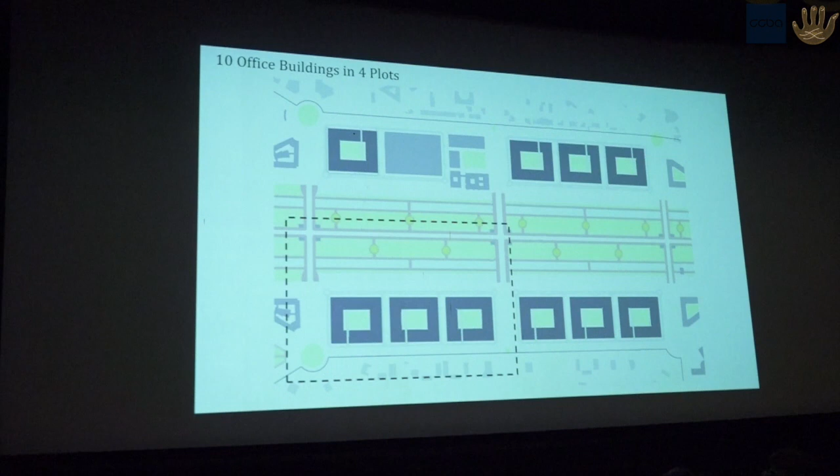The buildings are all inside secure compounds, 4 plots like this holding the 10 buildings. You can see this one here. I'll go into it in a little more detail. If you look at that here, that's the 3 buildings here. All of this is within a secure compound. Mind you, these buildings are inside presently walled compounds. No public space is being encroached upon.

Okay, this presently already is walled. It's got buildings, only poorly shaped and poorly laid out buildings. There's a loop road inside so that you enter this site from these 4 or 5 places. There are accesses to the basement. There's one continuous basement, half a kilometer long, so obviously you get lots of efficiency with lots of car parking.

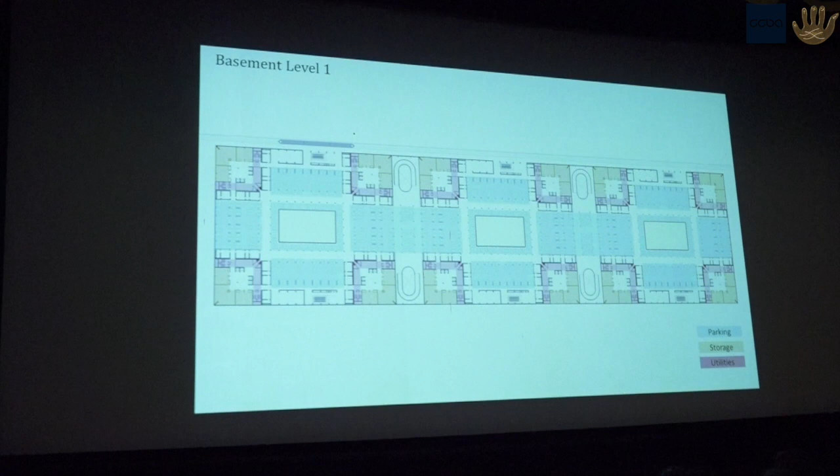That's the metro connection to the people mover. There's amenities, there's storage and utilities. If you look at one building, these are large buildings, 155 meters by 134, with a big courtyard in the middle, donut-shaped buildings with large trees in the middle. You might have noted in the basement that there's no basement in this area, so you can really get big trees. And in the ground floor, you have, of course, circulation through the building like that.

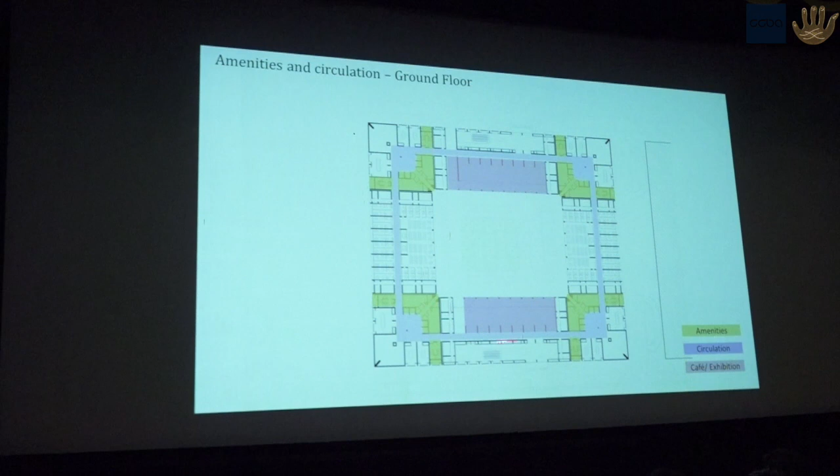It's a simple building. It's nothing complicated here. It's all rationality and all efficiency here. These are the amenities, and this is on the ground floor, exhibition halls and cafes. Then when you go to the upper floor, you get large open plan offices here, and you get modular offices in the cellular offices on the sides. If you take a section through here, they are ground plus 6 floor buildings. A month ago they were going to be ground plus 7, now they're ground plus 6, because as we do studies we find that this will work better.

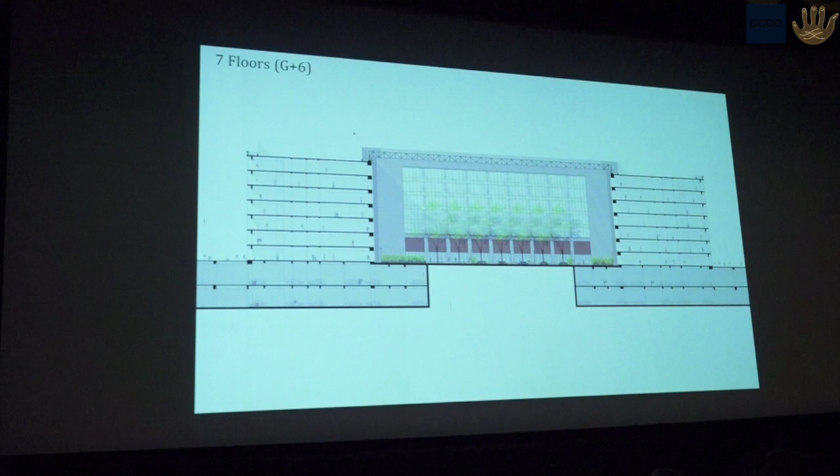Presently also from Rajpath, because of the 2 lines of trees, you cannot see any of the office buildings. Even these buildings you will not see, they're just marginally taller than the present buildings. If you take a section through the middle here, you can see this is the courtyard, these are the basements, 2 basements here. There's no basement here, so you can grow trees. Many elevation studies going on. The important thing is it's lower than India Gate here, the buildings, and that's the central courtyard with, think of Habitat Center but with larger courtyard.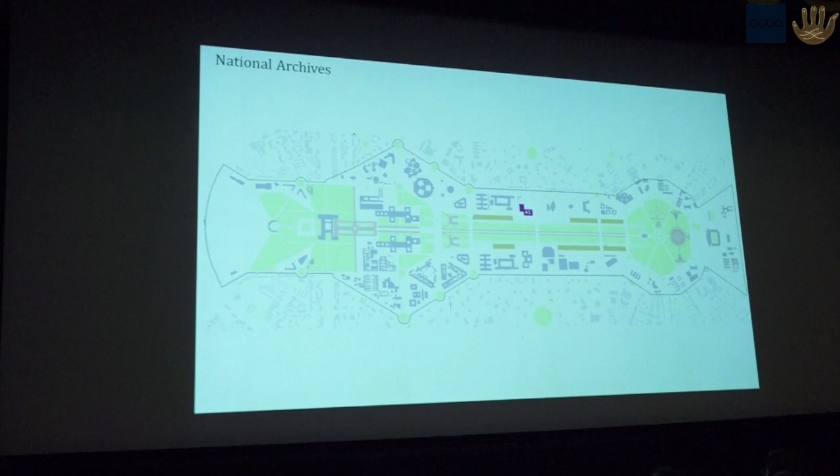There's also a central conference center planned here, and the National Archives, that's sort of part of the administration buildings. That's an old Lutyens building here which will be preserved, so that's the old building, that's what it looks like today. We'll of course refurbish it and retrofit it. It has wonderful spaces in the interior, but obviously this is not enough to have modern archives. Presently there is not enough storage space. A new facility has been built next to it, but it's not very much in keeping. So that new facility will be brought down, and a more efficient facility will be built next to it.

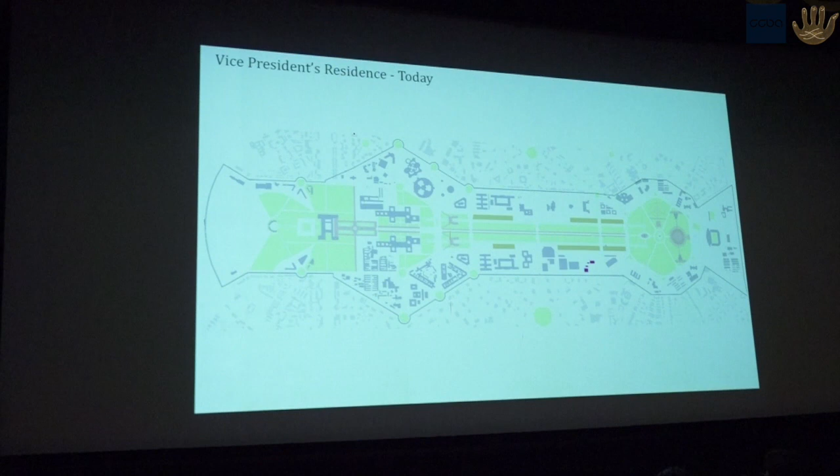Then the idea of giving adequate facilities to the Vice President and the Prime Minister. Vice President's residence presently is here. If you were to go there, you would immediately as architects say, oh, we can do better than what this is. We can do better in the sense of just sheer facilities. He has no adequate offices, there's no adequate space. It's all built on a temporary basis and rather poor, like all the office buildings that are there. So this plot was identified. It presently has hutments in this place. It's north of North Block, and the Vice President's residence will come up there, this site here. There is nothing more about this, because we haven't detailed anything more than this. That's just a sketch at this point.

Facilities for the Prime Minister, he lives elsewhere. These 2 plots were identified. They also have hutments presently. The hutments will move, and the Prime Minister's residence would come here. Of course, that would give an opportunity to connect everything at a subterranean level so that the VIP movement doesn't affect the rest of the people.

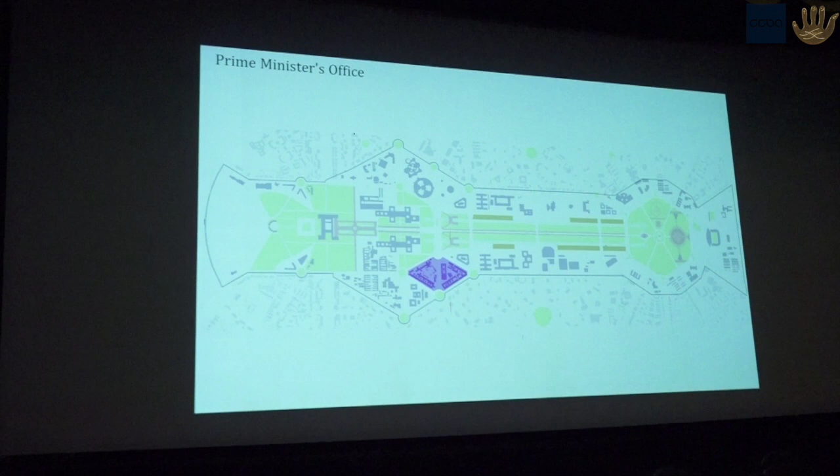There's hutments in this diamond-shaped plot. Once again, it's a prime plot. You can see on one side is the Parliament, and the other side is this. Here, of course, we will get the Prime Minister's office and a garden here with helipads, etc., because you need adequate offices. The present offices in South Block simply do not have enough space, or any modern facilities, for example, like a conference room or a meeting room, so you need to put in that. Refurbishing, better equipping the Central Vista Avenue is another objective of the project.

The avenue, by which we mean this garden in the middle, which is so important, but which has haphazard parking, which has a very tired landscape, which has poor paving, poor pathways, footpaths, ad hoc vending areas, no facilities for tourists, poor quality lighting. We can do better than this, and by we I mean as a nation. Inadequate signage, inadequate. This water body is dry most of the time.

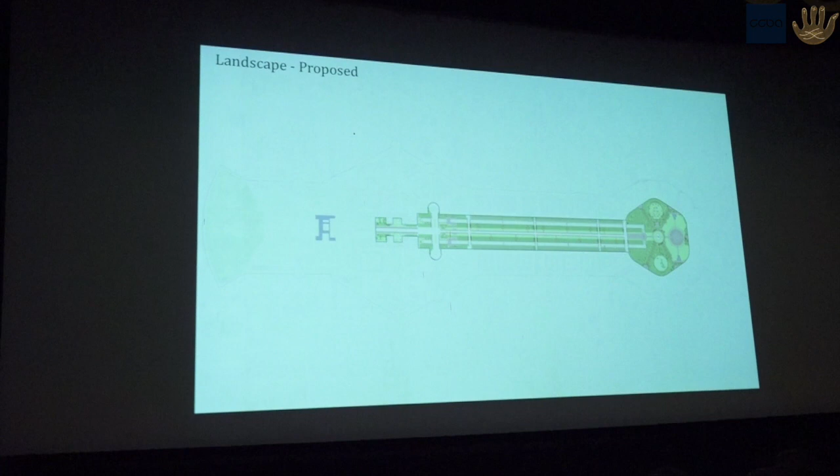So that's the plan. I'm not going to go into this in detail. Each of these can be a presentation by itself, of course. So that's the proposed landscape. It will be livelier. Rashtrapati Bhavan already has better landscape. We'll have a better water feature, more facilities for civic users, tourists. Once again, these are things that are still being worked out because the phasing of the work is such that we have to work on Parliament and the office buildings first, because they want them ready by 2022 for the 75th anniversary of India's independence.

So these areas will have better, more organized parking, pathways like this which are already being built, better signage, I understand using some example from Pune here, and planned vending areas here, underground passages for pedestrians, and in front of India Gate perhaps a better paved plaza than this sort of a road that we have at present which needs to be barricaded. Better lighting like in Lucknow or in Gandhinagar, and better facilities for the national events. It takes 3 months to set up the Republic Day parade arrangements, and that destroys the entire garden, and they start again every year. So perhaps we can do better than that.

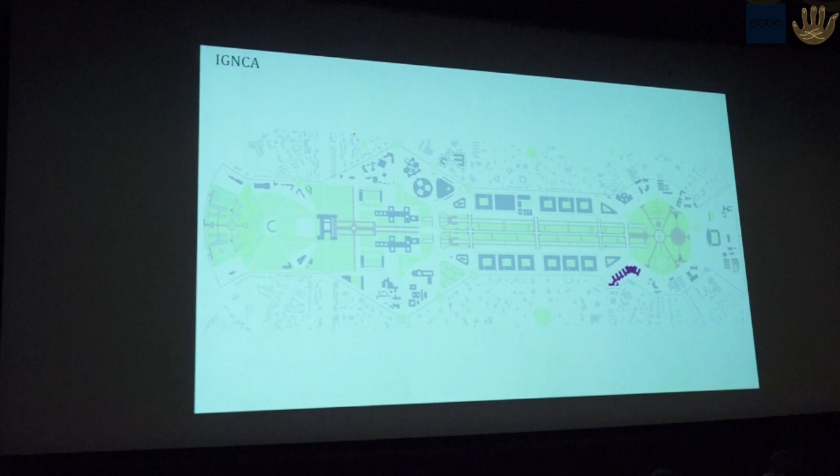Finally, strengthening cultural and recreational facilities. IGNCA, which occupies this large plot here with very small buildings, will move to this plot here across from Hyderabad House and have much better facilities than it has at present. More importantly, the National Museum, which is here at present, which has wonderful artifacts but a building that has very limited space, will give way for offices. But most fantastic, these two spectacular Lutyens' buildings, which are presently being used as offices, will become the great national museums of our country. This, I believe, is perhaps one of the most important aspects of this project.

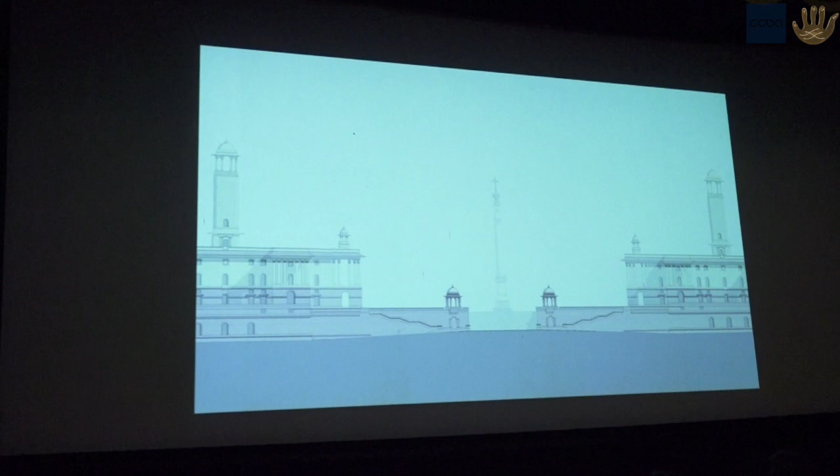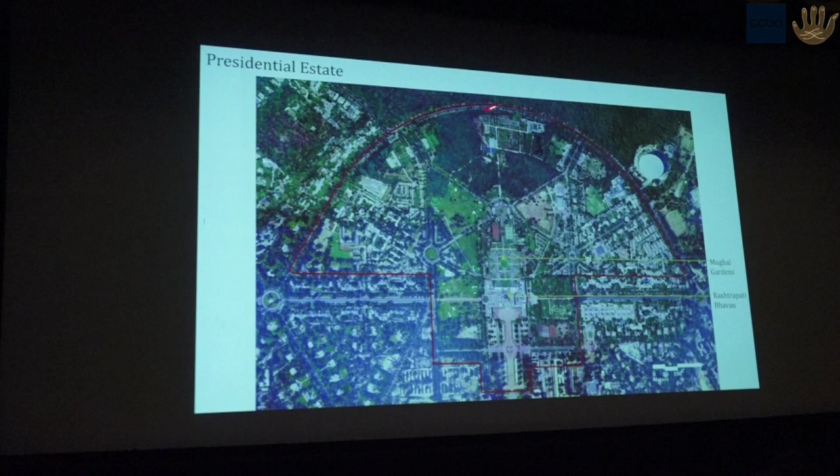Also, on the other end, near the ridge, this is a very important feature. Presently, you can see that's the presidential estate, that's Rashtrapati Bhavan. These are staff quarters for the Rashtrapati Bhavan. There are 1,200 quarters for staff members here. And there is some open area here which has vegetable gardens and a nursery which is to be relocated, so the vegetable garden nursery will come here, and that much land will be carved out from the estate as a public facility where there will be an arboretum of this sort, which has glass houses with the endangered species of India. That's the proposal still, but one day it will start looking like this.

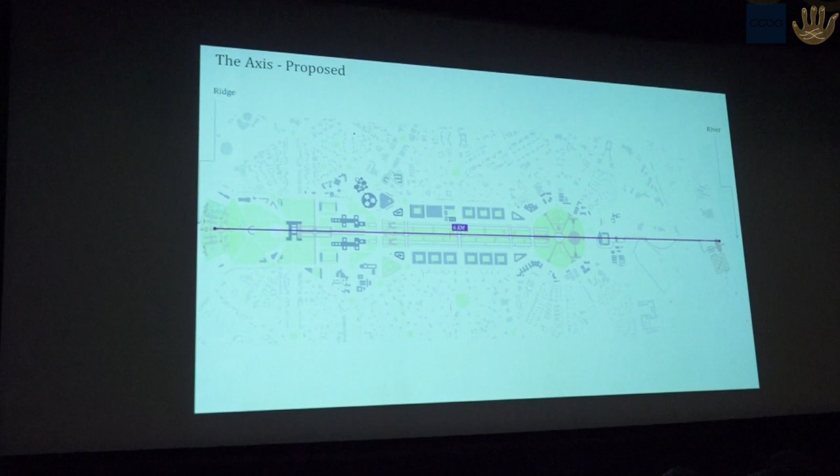So the whole idea of this project is to commemorate 75 years of India's independence by extending the vista from the ridge, so to say, to the river, as Lutyens had planned, and by expanding public space. Presently, that green area here is the public space of the Central Vista. By creating the museums and the arboretum at the back, we will be adding 75 acres of public space, and that's a sort of catchy way of saying 75 acres for 75 years of India's independence.